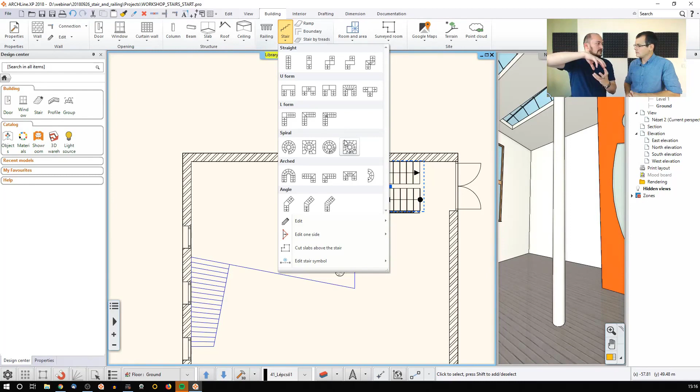This N represents that it can turn above itself, so it can be more than 360 degrees, not just a full circle. It can move above itself, so it not only returns to itself, but it keeps on going. That's the only difference.

Somehow it's also represented here, but the image is tiny. So I'm just explaining how this works. I will go with the simple one here, which can only take one full circle. And then this is how it goes.

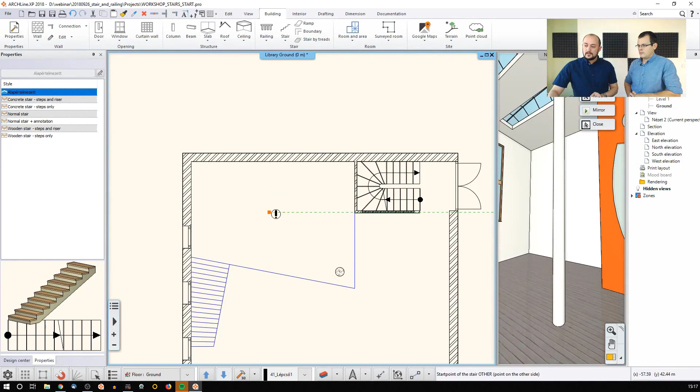You should set up the center of this full staircase with a click, for example, and then you can set up this hollow area inside. This can be something that you type. I'm working with meters, so I will type 0.1, for example. Let's just use point here, and then I hit enter.

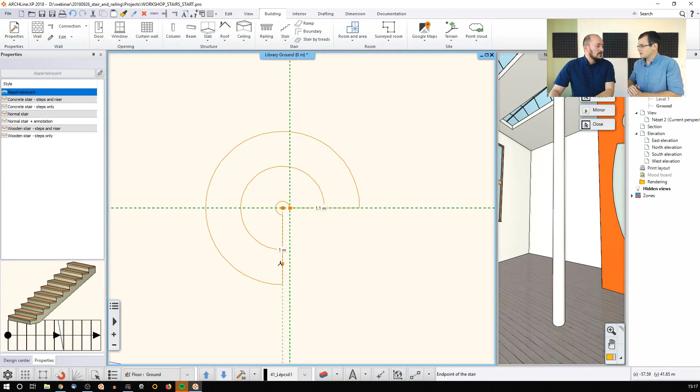So the software creates a staircase based on this information. It starts from this point, goes around, and comes to this point wherever I click. You just have to click on where you want the staircase to end. If I would like to make only a quarter circle or something like that, I just click here, and then again the software creates something here, as we can see, that staircase.

I can go to the settings of the staircase, and again I can change how this really behaves. Let me just change it to 300, or simply take the floor height. Now I can see that, well, this is very steep. I couldn't use it this way, so perhaps I need to increase the number of steps. Let me use a bigger value here. This means it should be a little bit larger or something like that. The software continuously recalculates this whole thing.

Now, one thing that can be interesting in case of a spiral staircase is this value here. This is called the walking line, or the walk line of the staircase. This is in the center of this geometry, and this is where the software calculates the ergonomical standard.

I can actually offset this. Let's just use, I don't know, 70%. Let's wait a little bit. See, now the walk line goes off to the side, to the external perimeter of this staircase, and the software recalculates the values, because the same stair has different ergonomical values here and here and here, simply because the steps are longer. I still use the same height, but the steps are longer.

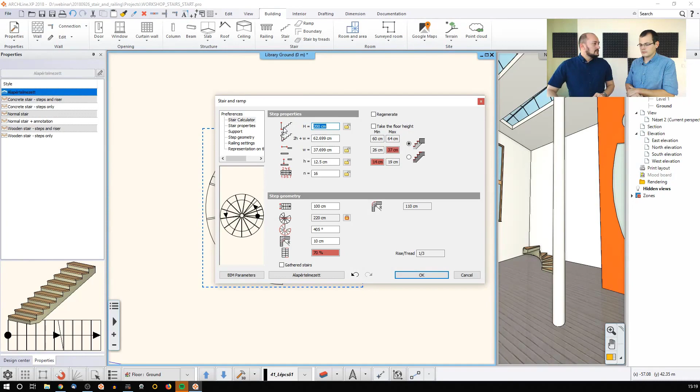So again, I can limit this back to 270. I can change this radius inside, I can change the whole size, I can change the width of the staircase. All these things will result in a staircase like this. And then I can change how the stair itself looks like.